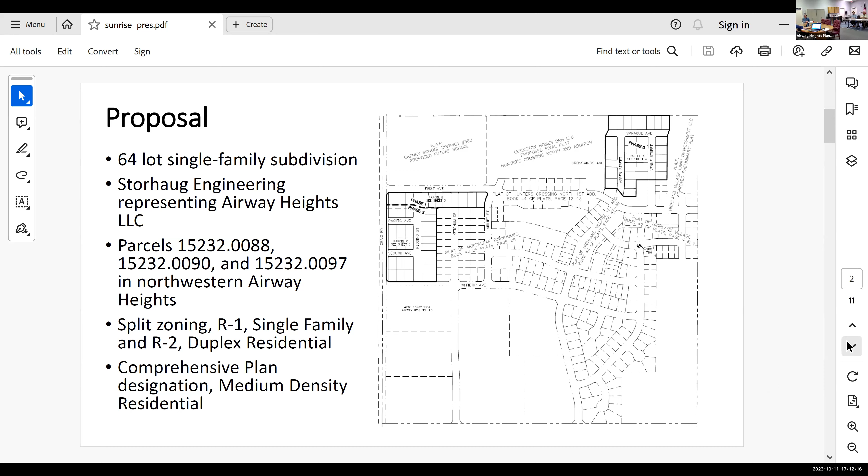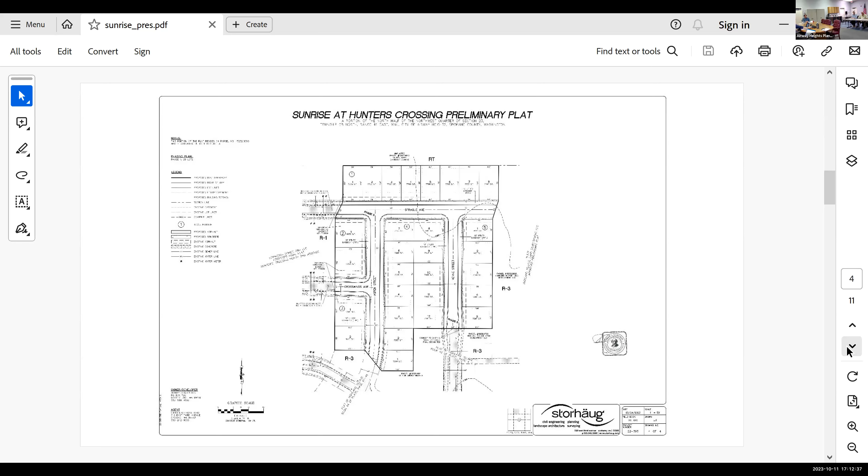The procedural requirements for this plat included an initial letter of complete application provided April 17th, 2023. The SEPA development application went out May 1st. We issued a determination of non-significance on June 5th, along with the initial public hearing notice. The Planning Commission was briefed on June 14th, and an additional notice of public hearing was provided for tonight's hearing on September 26th.

Tonight is the public hearing with the Planning Commission. Following the Planning Commission, if the commission recommends the plat to the City Council, we will have a study session first, and then a legislative public hearing for final approval of the plat with the City Council.

There were a few items we wanted to specifically go over with this application. The first one was there was a roadway deviation request. The Public Works standards require a 40-foot curb to curb right of way. The applicant was requesting a reduction to 30 feet.

Public Works deviation requests are an administrative function. We handle those internally. Our Public Works director and city engineer reviewed and provided an approval with conditions. Those conditions are included within the staff report and also within the recommended conditions of approval for the plat. If you want to go over those specifically, we can, but if not, they're available in your packet.

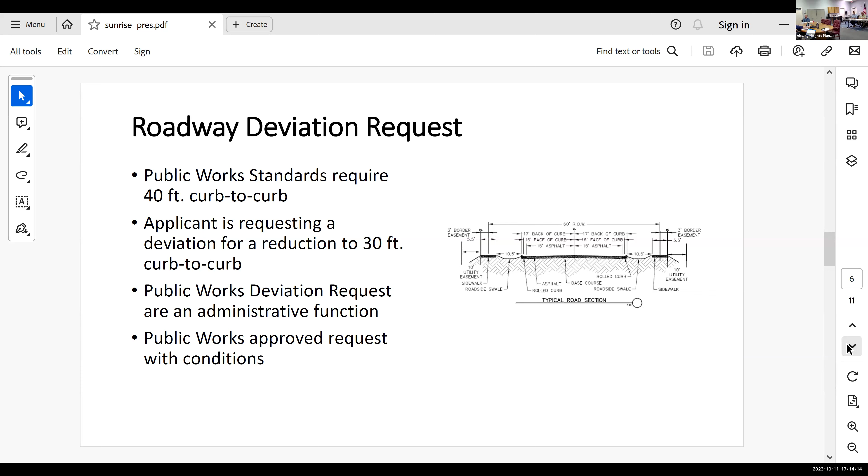There was also a park dedication request by our city's Parks and Rec department. This highlighted portion here was what was provided by our director. The applicant denied the request, which is their right under Airway Heights Municipal Code Chapter 16. We do not require for subdivisions any sort of dedication.

If the dedication is not provided, they are subject to impact fees. So we can trade essentially a dedication for impact fees. It's really specific, it gets into it in Airway Heights Chapter 16.09.

The applicant did make a statement that they may be still interested in doing a dedication. We have a condition of approval basically saying that needs to be done prior to final plat, because in order for the city to provide credit for that dedication for the park impact fees, we have to have it done on the final plat. So as of now, if they do not dedicate, they'll have full impact fees. If they do the dedication, we'll go through 16.09 and provide credit through that.

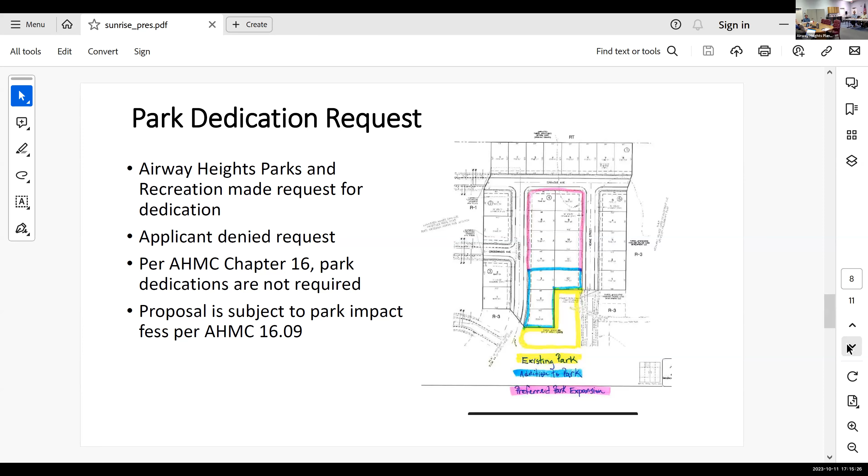The preliminary plat approval: city staff are required to review preliminary plats under 16.03.050 under these criteria. The first criteria is whether appropriate provisions are made for... sorry, there's a bunch of stuff I want to go over here, I just want to make sure I got the right page.

Whether appropriate provisions are made for, among other things, the public health, safety, and general welfare, community facilities, open spaces, drainageways, access streets, alleys, other public ways, transit stops, water supplies, sanitary waste disposal, utilities, parks and recreation, playgrounds, schools, school grounds, and shall consider all the relevant facts, including sidewalks and other planning features to assure safe walking conditions for students who walk to and from school, and whether the public interest will be served by the subdivision.

We have a full breakdown of every single one of these again in the staff report, but generally speaking, for traffic, frontage improvements and traffic impact fees will be required for the plat. Fire department did not provide any additional comments, so they're okay with what was on paper. Public Works, again, that road deviation was reviewed and approved.

For water, the plat is required to go through the concurrency requirements in Airway Heights Municipal Code 14.11. So water availability isn't established at the platting stage, it's established at the building permit stage, so we go through those individually.

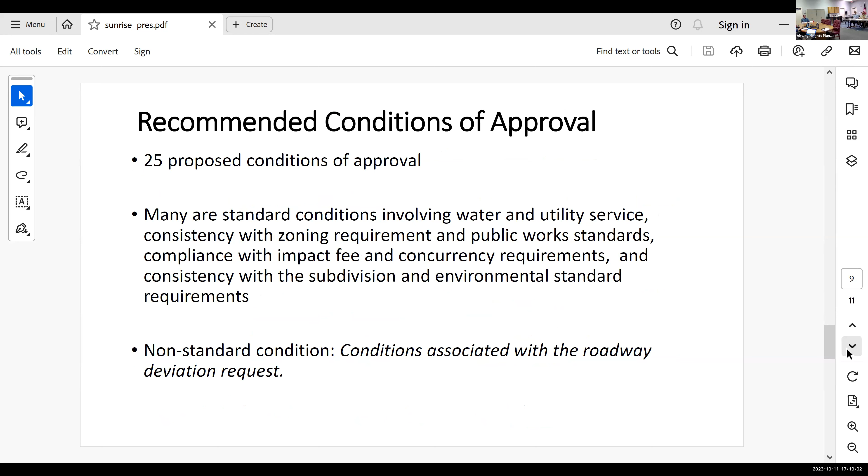So, required findings. These are the items the planning commission is required to review the plat on, per 14.05.03. The planning commission is required to find that the development is consistent with the comprehensive plan and meets the requirements and intents of the development code. Staff believes that it is, but it is the planning commission's responsibility to find that as well.

Development makes adequate provisions for open space, drainage, waste, streets, and other public ways, transit stops, water supply, sanitary waste, parks and recreation facilities, playgrounds, sites for schools and school grounds, and other public utilities. Staff believes that with conditions, we can meet those standards.

The development adequately mitigates adverse environmental impacts identified during environmental review—that's SEPA. The subdivision was issued a determination of non-significance. There was a question regarding whether an existing cultural survey covered it. They did amend that prior to SEPA review, so the Spokane Tribe of Indians accepted that. We have no additional issues with environmental impacts.

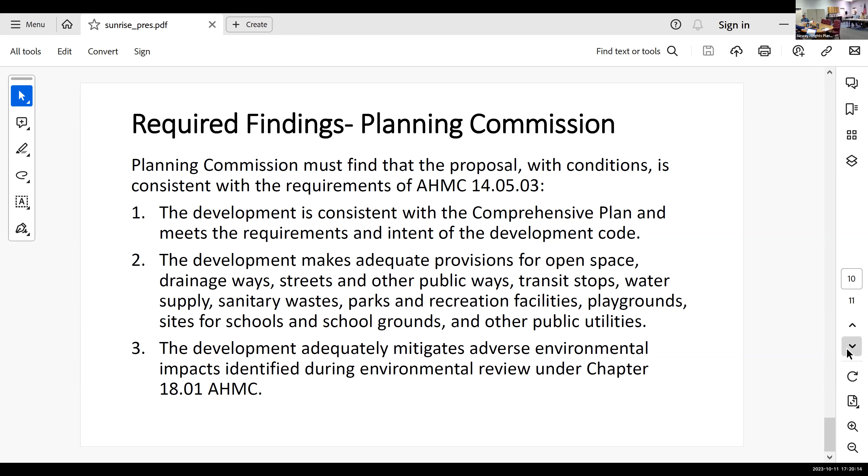The development is not harmful to public health, safety, and welfare and is in the public interest—staff believes that it is. The development does not lower the level of service for transportation networks or park facilities below the minimum standards established within the comprehensive plan. Again, through mitigation, we believe we can get there.

The area, location, and features of land proposed for dedication are a direct result of the development proposal and reasonably needed to mitigate the effects of the development. Staff believes that through the roadway dedications, that is possible. So that is staff's presentation.

We are recommending that, through PC Resolution 2023-016, the planning commission recommend approval of the proposed Sunrise at Hunters Crossing preliminary plat, subject to the attached findings, conclusions, and conditions, to the city council. I can take any questions, and then I can pop up the applicant's information as well.

I don't have any questions right now. I want to hear the other applicant stuff and then ask a question about the park stuff once it's all set.

Justin or Brenda, do you have any questions before we move on? I don't have anything. Brenda, I'm sorry, I didn't hear you. No questions. All right, let me bring this up and then I will let the applicant take over here.

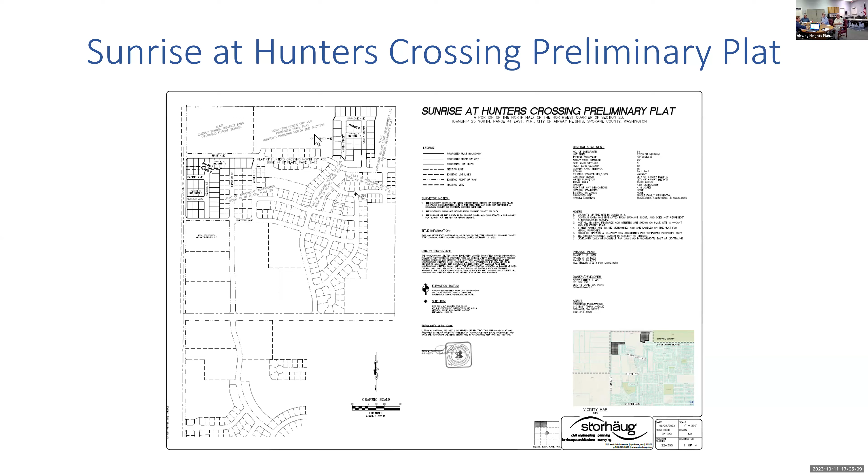Okay, so this is just a quick vicinity map. You can see Route 2 on the south.

Is there any way I can use a mouse to point? Thank you, it's a little tricky, you'll see.

Okay, so here's Route 2, here's Craig Road. It's a non-contiguous plat. Here's the western side next to the Arrowleaf Townhomes, and here's the eastern portion next to Hunter's Crossing North second addition and Highland Village.

And do I just click to? Oh, I do. Okay. Yes, you do.

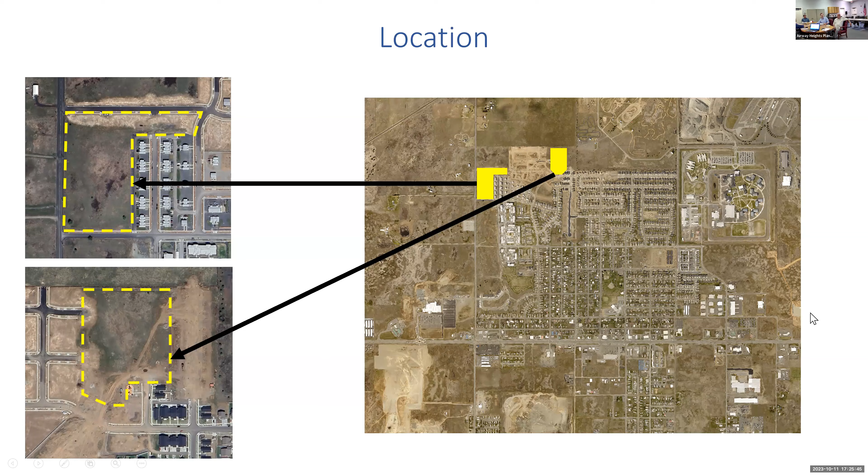Here's a bird's eye view of the project looking to the southeast. Again, there's Route 2, Craig Road. Here's the western portion, eastern portion, Hunter's Crossing North first and second addition.

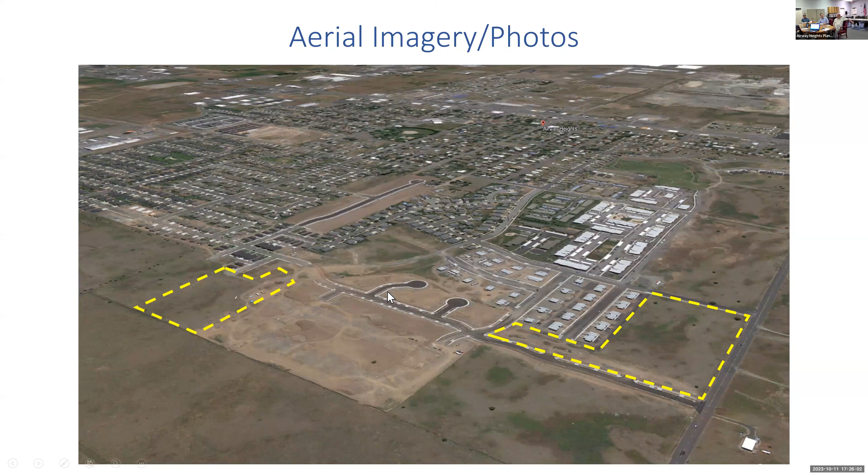Here's some photos I took just the other day of another neighborhood nearby with a narrower than typical street section. It's not going to quite match whatever we end up designing, but this is going to look like a typical subdivision in Airway Heights.

Jumping to some of the studies we did to get to this point, one of them was the cultural study that Zach mentioned. It was initially done for a larger project area under a separate application called Sunrise at Hunter's Crossing. It's a little confusing.

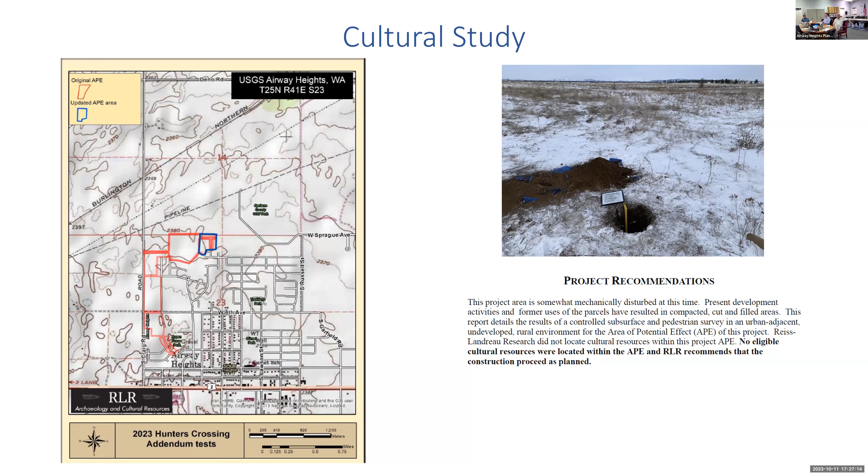You can see one of the test hole pits. As you can see, it was done quite some time ago, so there's some history to this project. It was done by RLR, Archaeology and Cultural Resources, and they found no eligible cultural resources located within the area and recommended that construction proceed as planned. The Spokane Tribe also concurred with the results of the study.

A little more history: we did sewer and water analysis. This slide shows the ERU analysis, the equivalent residential unit analysis. There's a lift station south of the site with a capacity we calculated at 670 units that it could service. We did a simple calculation of the existing and vested developments in the area, tacked on our potential units, and determined that all of it could be serviced by the existing lift station.

It's hard to read because there's a black bar, but per the staff report, the city engineering department came to the same conclusion, that there is capacity for sewer for this development. And as Zach said, water capacity isn't determined at this platting process.

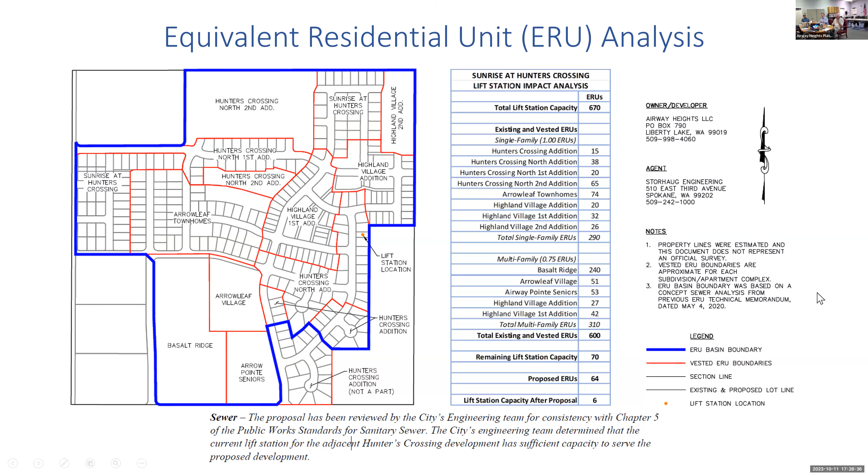Let me know if you have any questions or if I'm going too fast. I just want to be respectful of your time.

Jumping to traffic and road, here's that road section we proposed. Thank you for the road variance, we appreciate it, and we're looking forward to working with the conditions of approval and ironing out the official road section in our engineering process. This part here covers those conditions of approval I just mentioned.

Another part of this is the traffic analysis. We had Ann Winkler, a professional engineer with Sunburst Engineering, do a traffic impact analysis for us for the Sunrise at Hunters Crossing project, a larger development which actually had duplexes proposed. Her conclusion was that we should just follow procedure and the developer should go with the traffic mitigation fees for the previous development. After this new application, she came to the same conclusion, that the traffic impact mitigation fees would be appropriate for the future development.

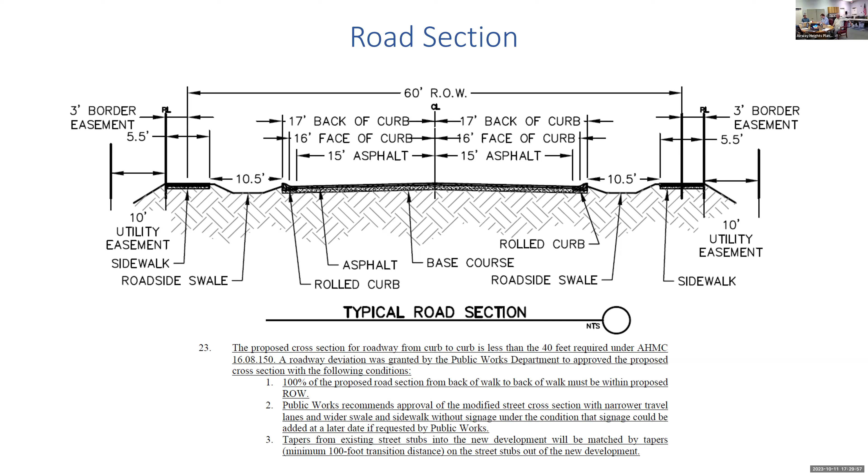I know that was kind of quick and a lot, but we've read the conditions of approval, as has the ownership and our legal counsel, and we concur with them. We appreciate your time and knowledge and working with us, and we're looking forward to answering any questions you guys might have.

I'm just curious why you all decided to not have more park space, but leave it open to add more instead of just having a definitive answer.

We, our legal counsel, wanted to leave that open to the future developer. So Airway Heights LLC, they're just setting this project up to a preliminary plat approval, similar to the Hunters Crossing North first and second addition. And then after the preliminary plat approval, they're going to sell it to a developer. We just want to leave that option open to the future developer, and keep with the same procedure as written in the 16.09 code.

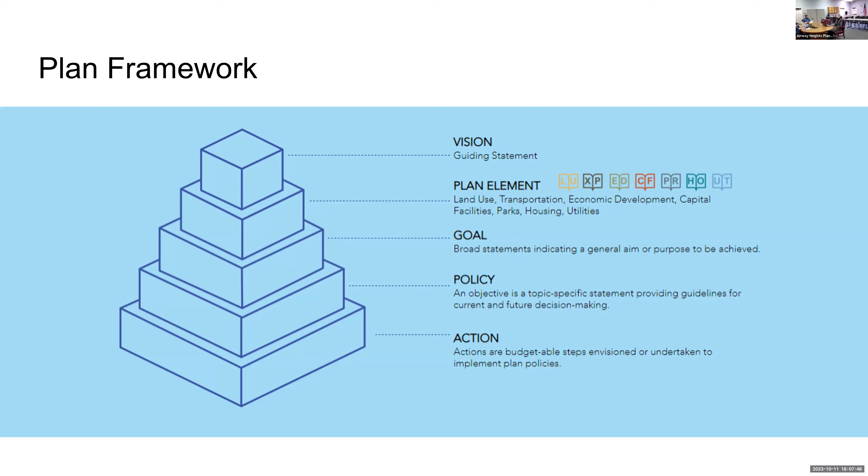Next. This is also another visual tool within the plan that connects the goals to the various chapters. As you go through a chapter, there's a color, and it highlights just that color. So how does parks connect to these goals? Well, by following the colors, and everything else fades into the background, it becomes visually oriented to understand which goals are related to each chapter.

Next. Here's the big piece we've talked about in some detail—we expanded this plan a few more years because we're doing this right after our normal periodic update, which had a horizon year of 2037, since the plan we were required to adopt had to occur in 2017. Every comprehensive plan is required to have at least a 20-year vision.

We looked at the amount of growth that was occurring, and with our consultant evaluated how quickly we were growing compared to the state's projections for the county and the allocation of population we received. The consensus was that we were going faster than what the allocation had given us. So as we looked out a little further, we planned for a faster rate of growth than what we'd originally been assigned through this county process.

So just backing up one step—as part of every update required by the state, the county gets an allocation of total population growth, and then the communities within that county allocate a population number to every city and to the county, and they're supposed to plan to that number. We were already growing faster than that number, so we looked at a higher number for our potential growth.

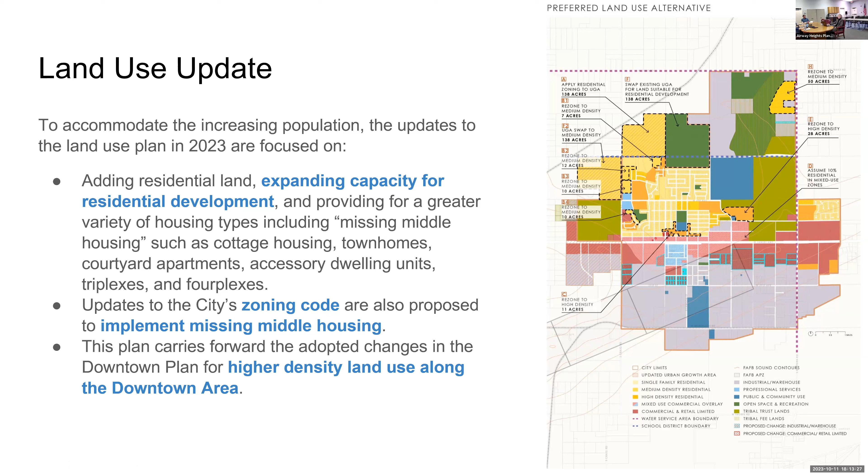Any questions about the map? Okay, next one.

So this slide is just out of the comprehensive plan, which was basically the exercise of showing how many units potentially we could get out of each of these areas we redesignated. So one of the tactics around the plan to make it more user-friendly is Volume 1 is maps, goals, and policies, whereas Volume 2 is where the analysis is contained.

A little bit similar to your high school math, where you have to show your homework. We still had to show how we arrived at the conclusion of the relationship between population, available land, and total number of housing units needed, and whether the decisions we made would arrive at the right number of potential housing units. Remember, we're a local agency—we can't actually build this housing. What we do is create the setting at the table by having land uses designated with densities and eventually updated development regulations that enable this housing to occur.

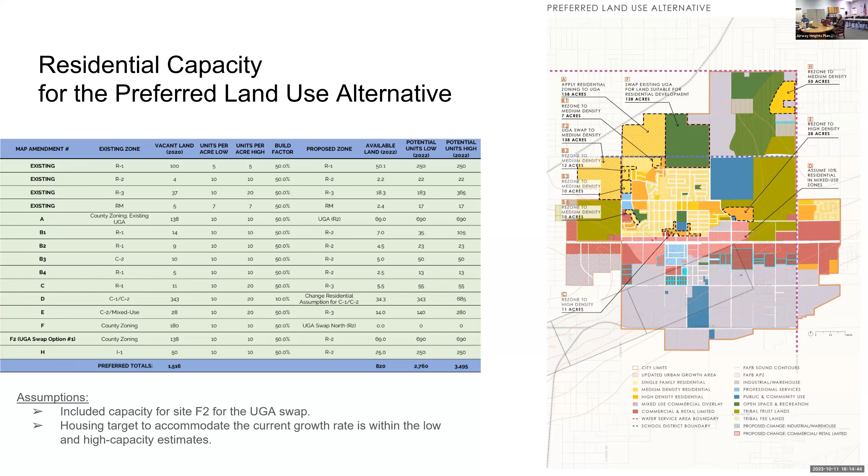You'll be hearing this over and over for the next three years, that we have to set the table to enable it. We are not able to actually create housing. Can you go to the next slide?

So we went over the future land use map in a lot of detail. Let's just move on to the next one.

This is the housing element. So the idea, the policies that we looked at, were supporting what's called missing middle housing. A lot of our community is predominantly detached single family homes or large apartment complexes. At a state level, there's a recognition that there are all these other housing forms that can help support housing with rental and homeownership opportunities. These are just some visual representations of that.

But it would include accessory dwelling units, otherwise known as granny flats, duplexes, triplexes, fourplexes, courtyard apartments, which are low-rise apartments around a courtyard, cluster single-family housing, otherwise known as cottage housing, and townhomes, which are individual homes where they share a property line and a wall, but it's actually a home on its own lot. These are examples of the types of housing that our plan embraces and that will actually be required of us to allow to be developed as part of the next comprehensive plan, which will be due in 2026.

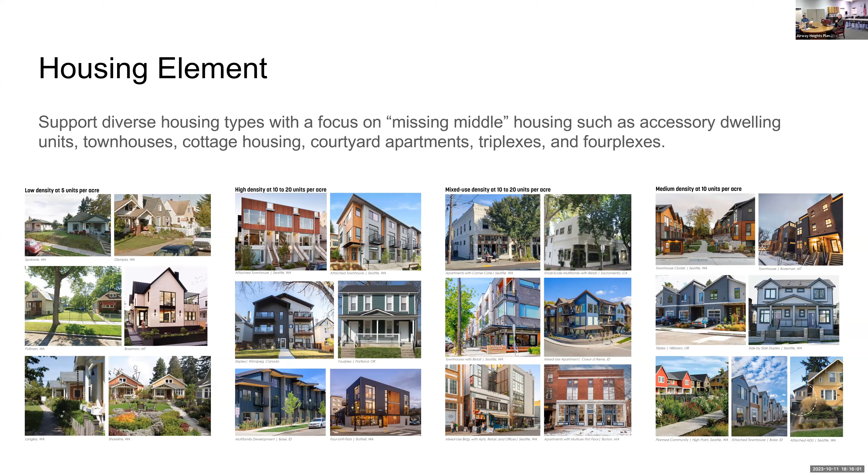There's a lot in the transportation chapter, which has to do with identification of not just vehicular roadway improvements, but looking at what's called multimodal, which is bicycle and pedestrian facilities and transit. There's a large emphasis on encouraging ways to get around a community without having to use a vehicle.

So we've expanded our plans, identifying development of additional routes or expansion of bicycle facilities through direct bike lanes, shared use paths separated from the roadway where it's wide enough for both bicycles and pedestrians, infill of sidewalks, and assisting with the expansion of transit in our community. Next slide.

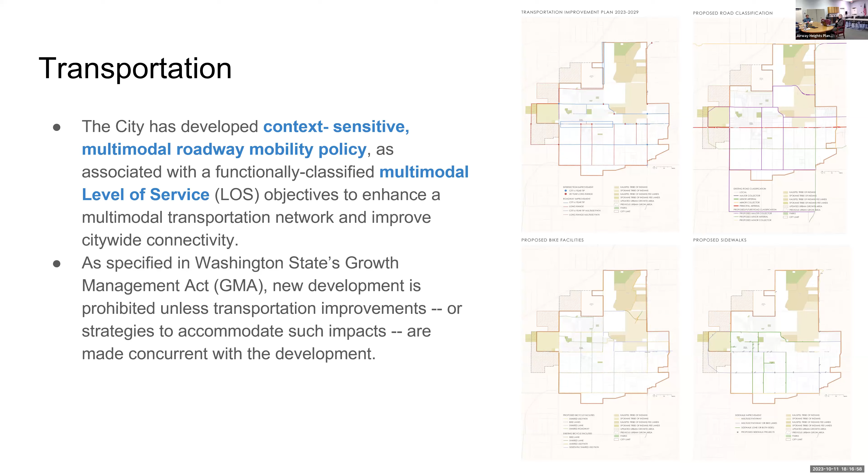Then we have another piece of the plan, in addition to Volume 1, which is a more reader-friendly version easily accessed by the public. There's Volume 2 with all the technical detail. But the third element we've been working on is a web-based version. So instead of opening a large document on a computer where you scroll through hundreds or even a thousand pages, the comp plan will be made as a website where it's interactive.

So if you want to know about a goal, you can click to that, or if you want to look at a specific chapter, you can click to that chapter. If you want to just look at maps, you can click and look at the maps. It'll make it easier for people to engage with the plan and see it readily. It'll be linked to the city's website, and we hope it'll be a tool people can relate to more.

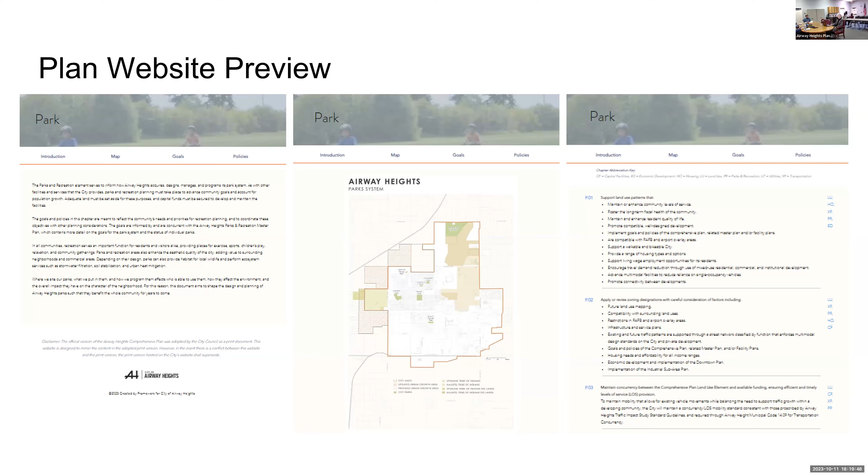Are there any questions from the planning commission before opening it up to public testimony? I don't have any questions. Brenda, Justin, Bill? No, it was all very thorough. Nope, I read the packet as well. Yep, thank you, straightforward and same thing.

Great, thank you. And with that, I just have one quick question about the website development. Are you folks doing that in-house or getting some help with that? Yeah, Framework will be doing that, so they designed the plan.

They've been facilitating that, that's on them. We're one of the few there. I think there are only maybe one or two other communities in the state at this point that will have a web-based plan. So that's exciting for us to be on the cutting edge of technology and making this kind of work more readily accessible to the public.

Washington State Department of Commerce representatives were at the open house last week and they saw this and they were really excited. They've committed that as they look at other communities having to do their comprehensive plans, they'll recommend a web-based plan to make it easier to read. Definitely makes it more accessible to people, and that's a nice thing, right? Letting residents know what's available to them instead of trying to find it.